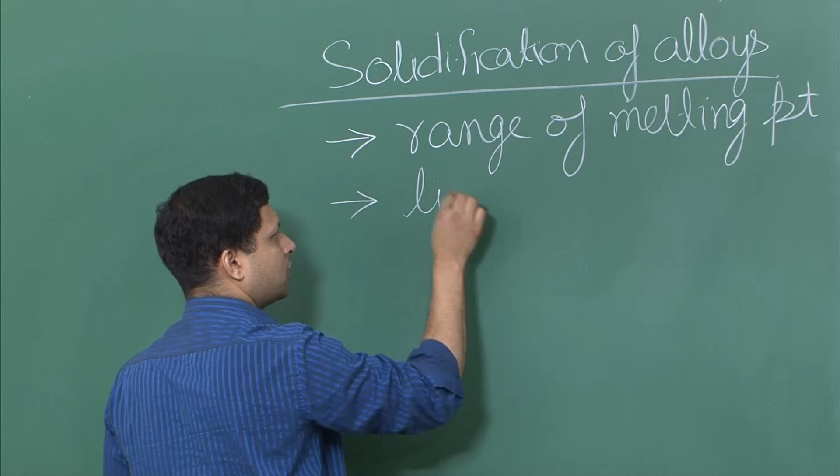What do I mean by range of melting point? Remember, it has a liquidus, it has a solidus, and in between these two temperatures the material remains or coexists as liquid and as solid. Therefore we can say that all the temperature range between the liquidus and solidus is the range of melting point.

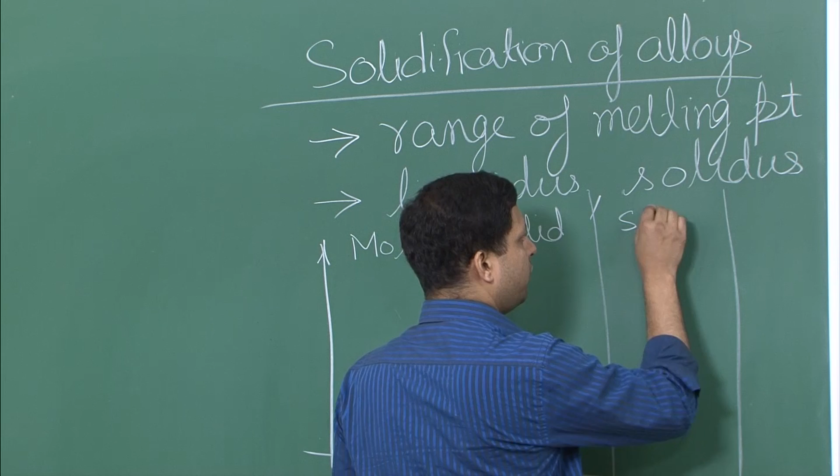So how will that make a difference? Let's start with how the temperature profile would look like. Here there will be a difference. So far we were talking only about mold, solid, and then used to come liquid, but here we will have another phase where we have both solid and liquid, and then comes the liquid.

So the temperature change, even if you are talking about these four layers, the temperature profile would look like this. We are assuming again the most general case, so there will be probably a temperature, heat resistance, interface resistance over here, and then from here and so on. So what do you see?

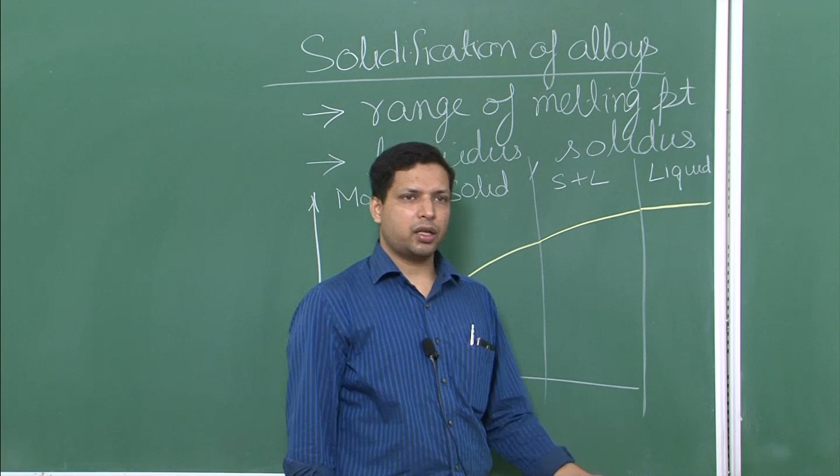The temperature in the most general case will show a temperature drop in mold, a temperature drop at the solid and mold interface, a temperature drop in the solid plus liquid region, and even here if we assume liquid at Tm, that is without superheat, that is not going to be a problem, or that will not take away any kind of information from us, but still it looks like a very difficult problem to track.

So again we will not look at how to derive this analytically - in fact I am not aware of any analytical solution for a case like this. Instead, what we will look at is what solidification rate people have observed experimentally, and see if we can relate it with what we already know.

Now if we are drawing this, let me draw what exactly these look like. This is your mold, now this is your solid, this is a liquid, and in between solid plus liquid, what do we have? Here you have some growing solids which exist along with the liquid.

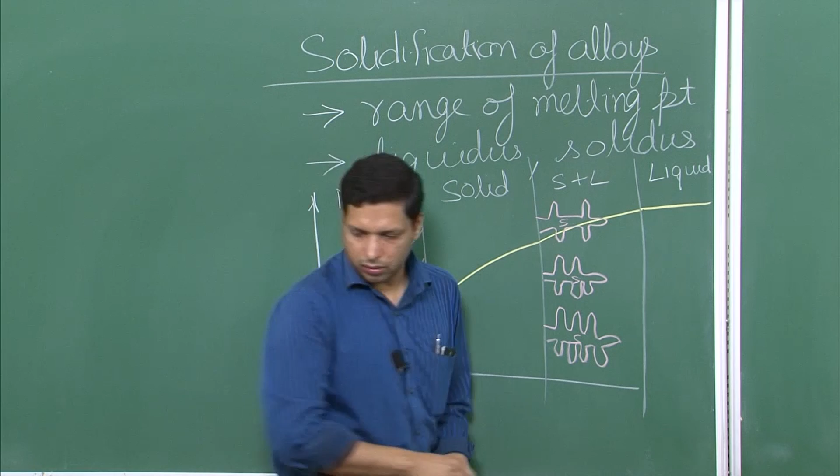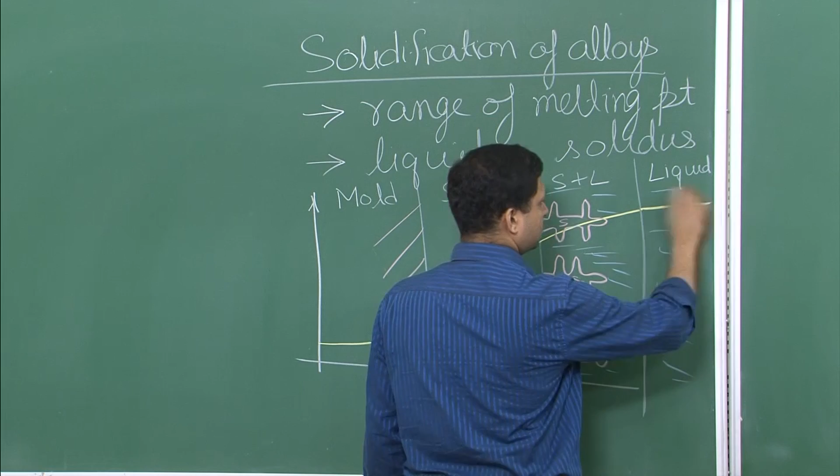So here this is your solid part, and let us use a different color - so this is liquid. And this is the solid part. So if we have...

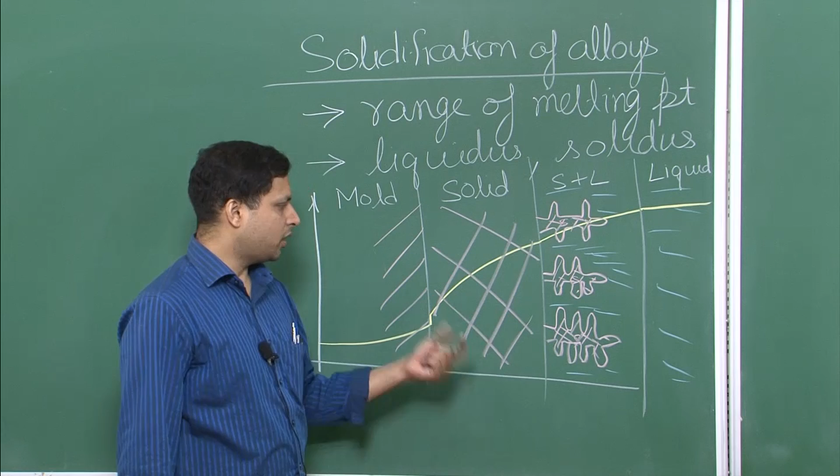Here is the mold, here is the region where there is only solid, and here is the region where you have both solid and liquid, and here is the region where you have liquid. So now you can clearly see that there is an interface up to which only solid exists. So that is your solidus line, and we can call it XS.

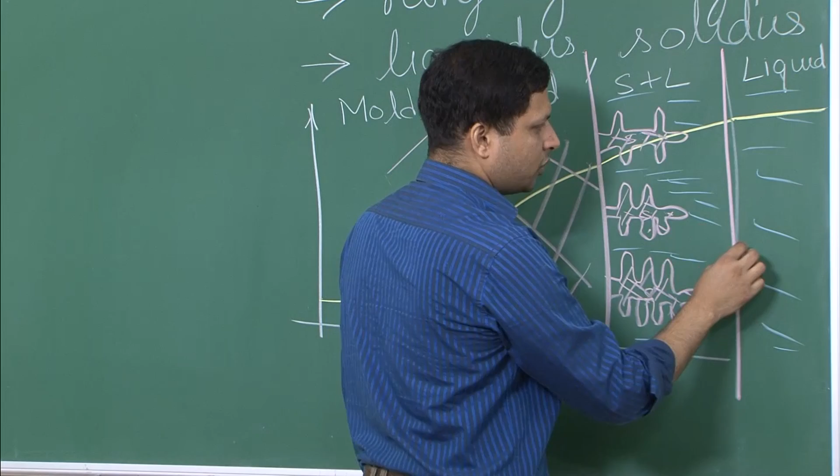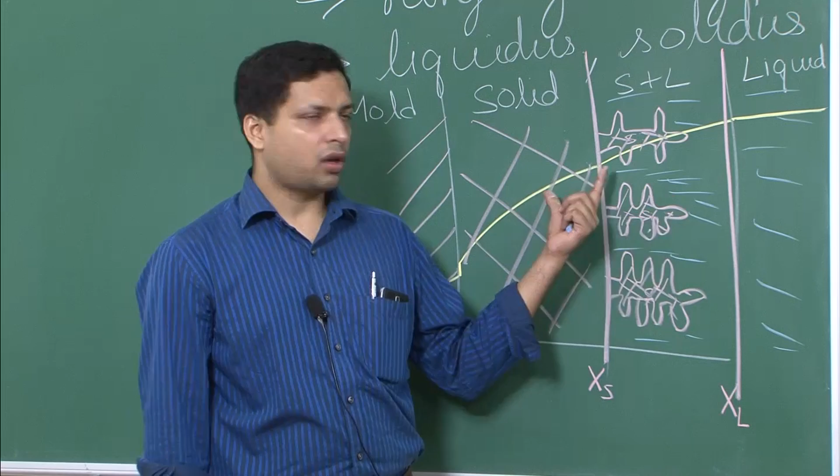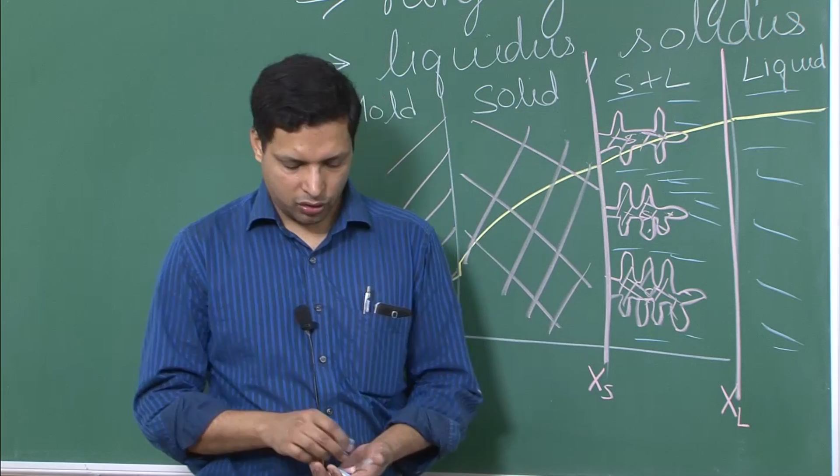This is a line beyond which you have only liquid. So this will become your liquidus line, and let's call it XL. Now when we are looking at solidification rate, or basically the S versus T plot, we will not be looking at only one line. Remember, earlier we had only a solid-liquid interface, so we used to draw only one plot, but now we have two things to look at, XS and XL, the solidus line and the liquidus line. So let's draw how this will look like.

So S is the length which has crossed or which has solidified in terms of liquidus or solidus, and now this is, let's say, the top of the mold.

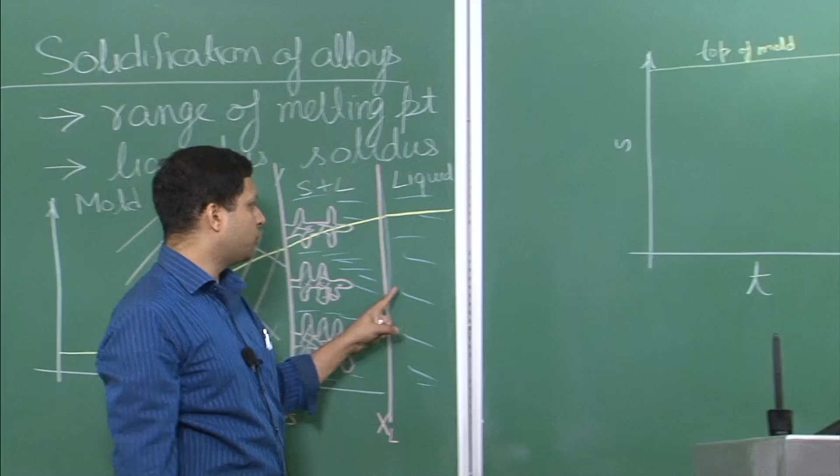So now for the solid, the first interface to reach the top of the mold would be liquidus, as you can see, it is ahead of the solidus. So in terms of time, it will reach this point earlier than solidus, and it comes out something like this.

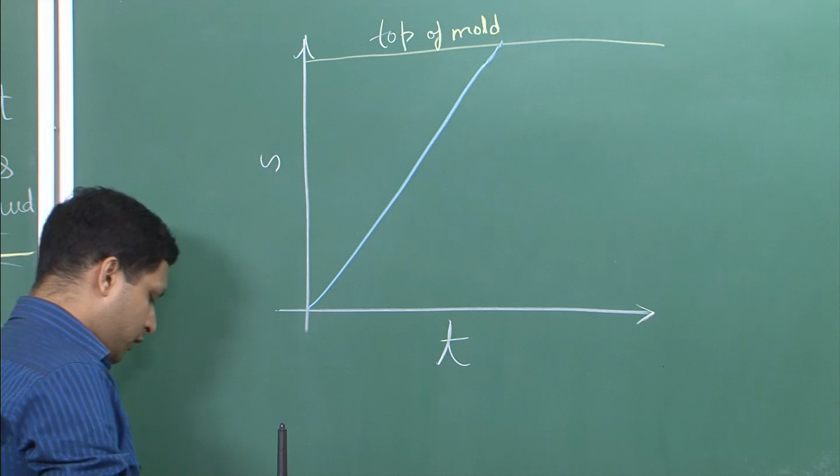And for the solidus, you get this plot. So this is how the plot looks like, and there is just one modification: this has to be root T, because we are assuming an insulating mold kind of condition.

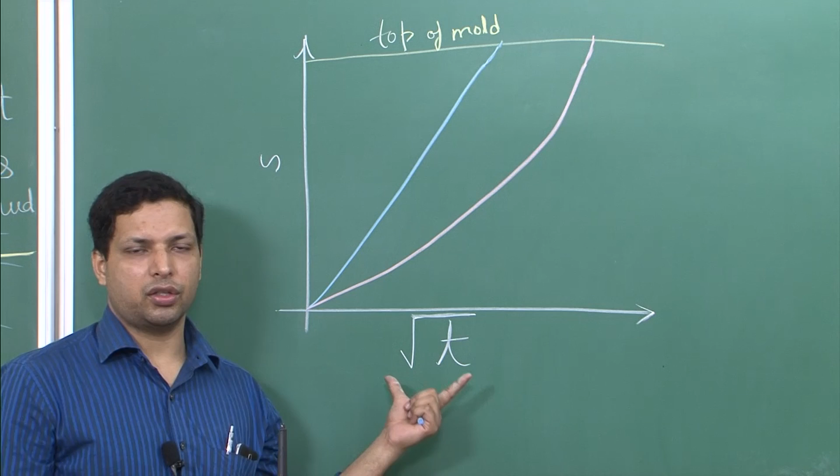Whenever we have a sand mold like this, the condition is like that of an insulating mold, and for insulating mold, you remember, S is proportional to root T. Remember I had earlier mistakenly written it as T. It is not T, it should be root T. So S versus root T, you see a straight line.

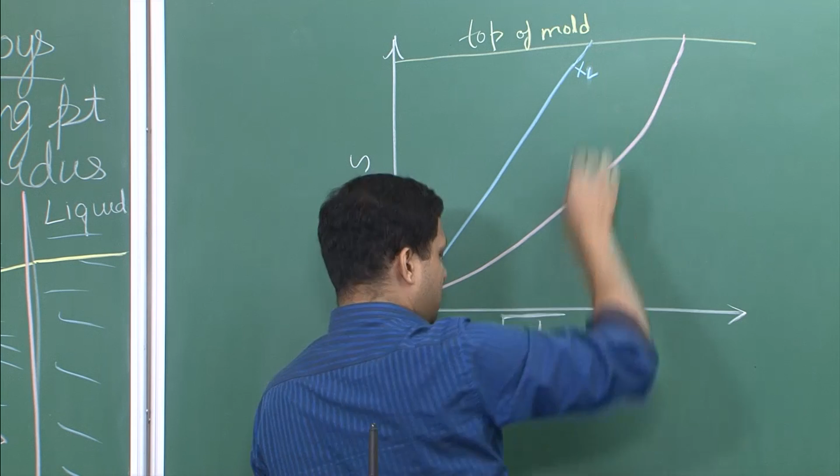Now there are a few things you can look at in this plot and understand. One is that the liquidus—so now this is your XS line, and this is your X, this is your XL. It has reached the liquidus, reached the top of the mold earlier, and this is your solidus line.

So as you can see, liquidus has reached the top of the mold, or it has reached the end earlier. Solidus has reached after that. We already know this from here: this will reach earlier, this will reach later on.

Another thing is that XL follows a straight line between S and root T. So it very nicely follows the S versus root T plot. Therefore it agrees very much, you can say, with the insulating mold condition.

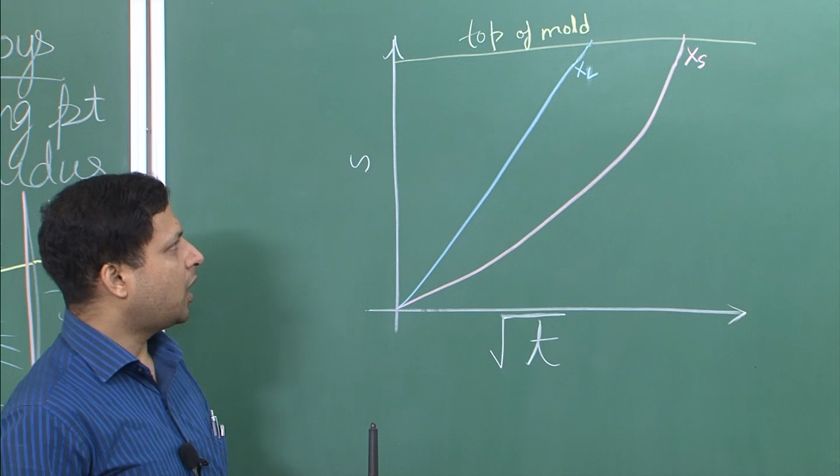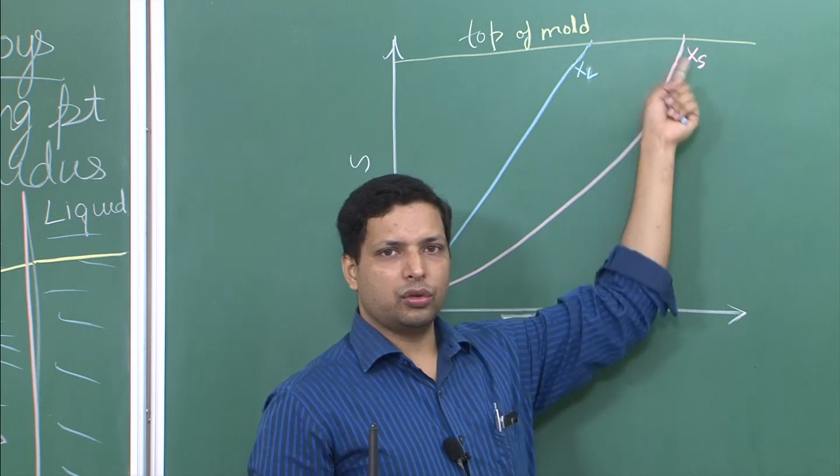On the other hand, XS, which is the solidus curve, shows some variations. Although it is a straight line to most extent, towards the end it rises very sharply. So there is some change that occurs towards the end, and you can understand that once the liquid has solidified, then suddenly the concentration—we will see that more when we talk about composition—towards the end the composition rises abruptly, and that may be what is leading to this change in the plot.

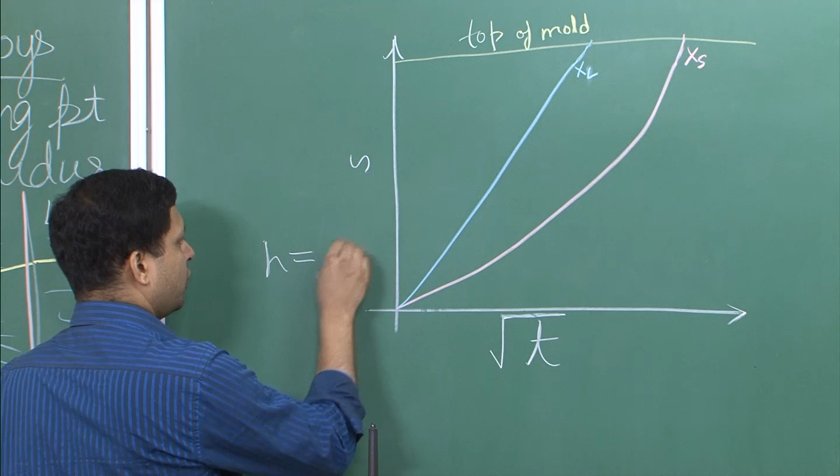Now another thing is that when we are doing this, we are assuming that H is equal to infinity. What does H equal to infinity mean? It means this is 0, there is no gap over here, or there is no interface resistance.

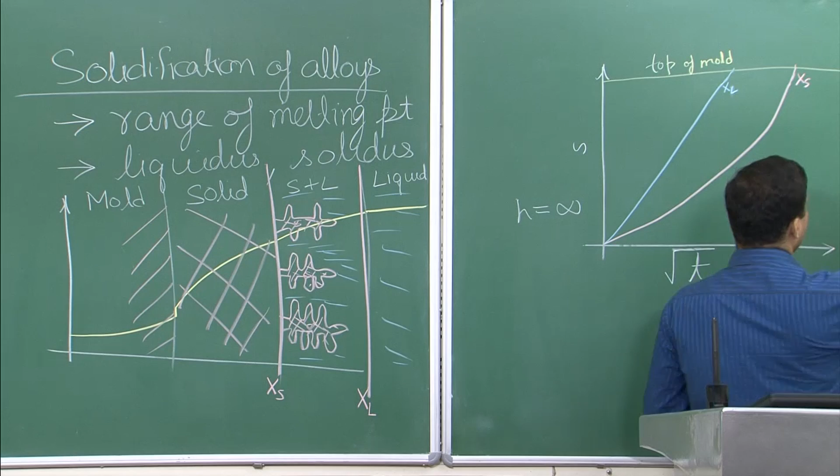If on the other hand we take H as some small quantity, it means that there is some amount of interface resistance, and that will lead to some change. What changes will we see?

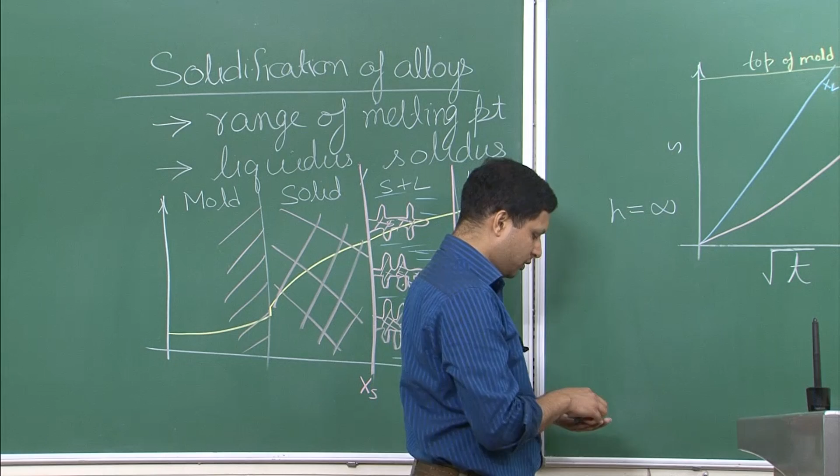So the first change is, in terms of liquidus, you don't see much change. The liquidus remains as it is. So this is S, this is root T.

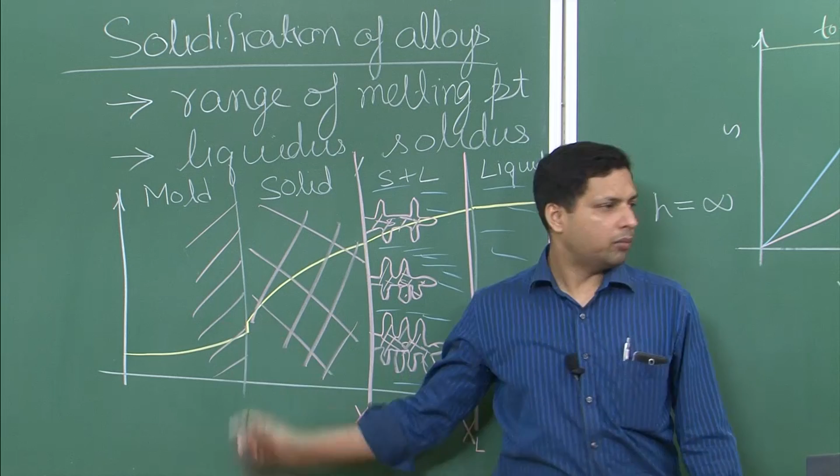But when it comes to solidus, you see a shift over here. Overall the plot remains the same, but over here, because of the presence of interface resistance, whenever there is an interface resistance between the solid and the mold, you would see that the XS, which is the solidus plot, gets shifted a little bit in time. It starts a little later.

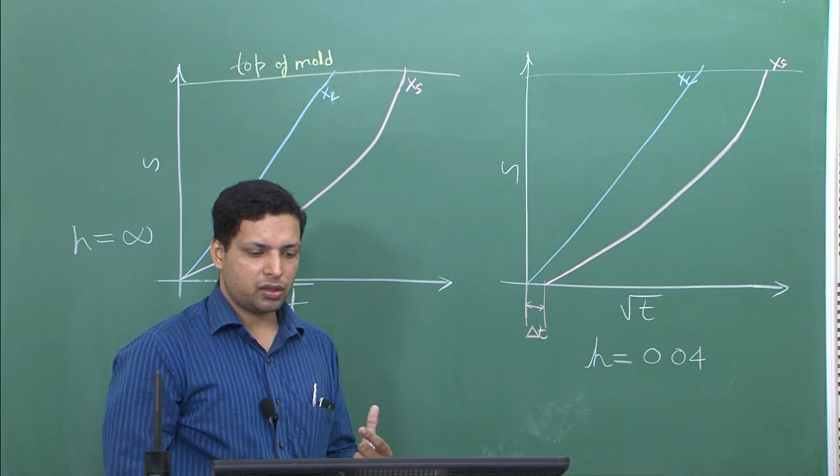And remember, we talked about it when we said that S equals A root T minus B, kind of has the experimental form, that is what people have observed. And that delay, one reason suggested was that it is because of the interface resistance, because in some materials or configurations where you say there is no interface resistance, there is still some finite interface resistance, and that is what leads to that minus B term.

And this is what we can see over here. Here we have some finite interface resistance, and this leads to a delay in the solidus curve. So these are the two different kinds of S versus time plots that you will see for the alloys.

Now there are a few more things that we should look at. If you look at this gap, what does this gap represent? For any particular time, what it is saying is that your solidus is at this point and the liquidus is at this point.

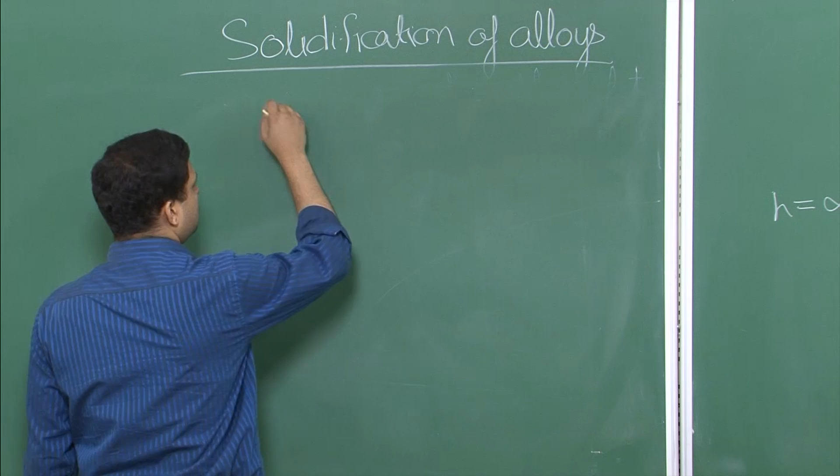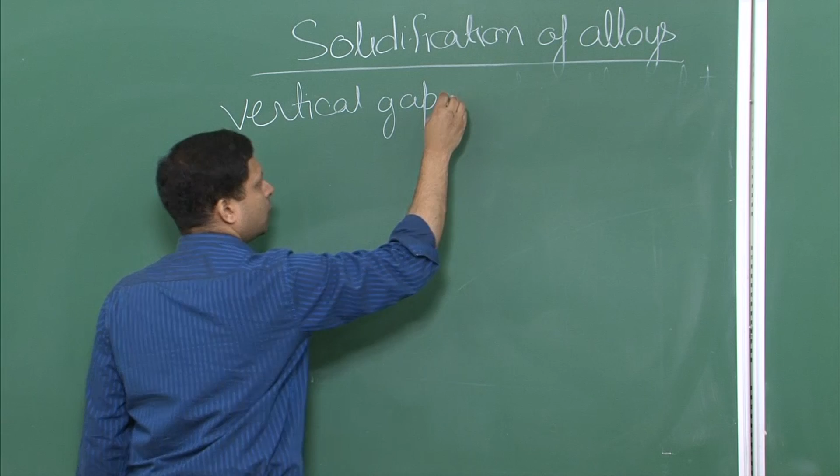Let us give it a name - it is called width of mushy zone. It is not a name I am giving it, it is what it is called. So this vertical distance, that vertical gap that we get, it represents width of mushy zone.

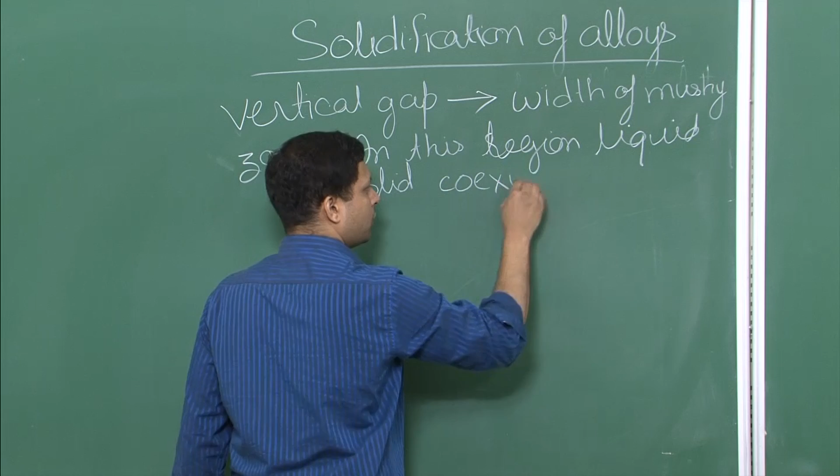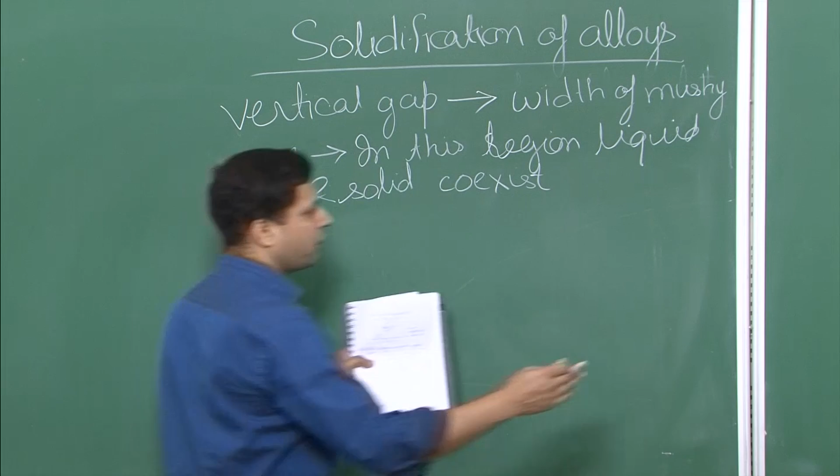Why is it called or named like this? Because in this region both liquid and solid coexist. If you look at this particular time, this is where the liquidus is, this is where the solidus is, and therefore it represents, from your original plot, the region where both solid and liquid exist. So it represents the width of that region, and therefore it tells you the width of the mushy zone.

Now there are several important points that you must be aware of when we are talking about this width of mushy zone. One, it determines the macro segregation behavior.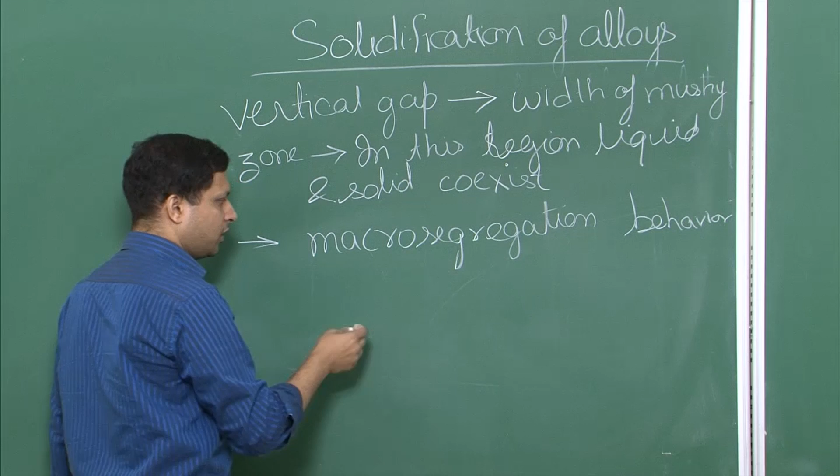And not only macro segregation, since it is influencing macro segregation, it also influences and can influence the overall microstructure.

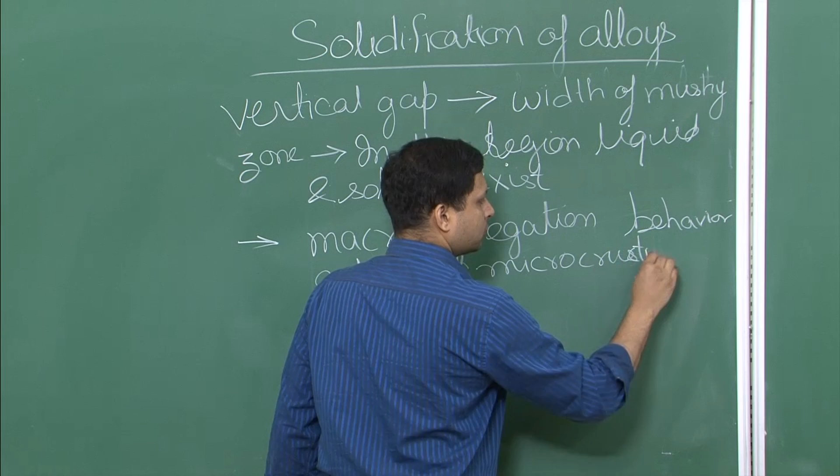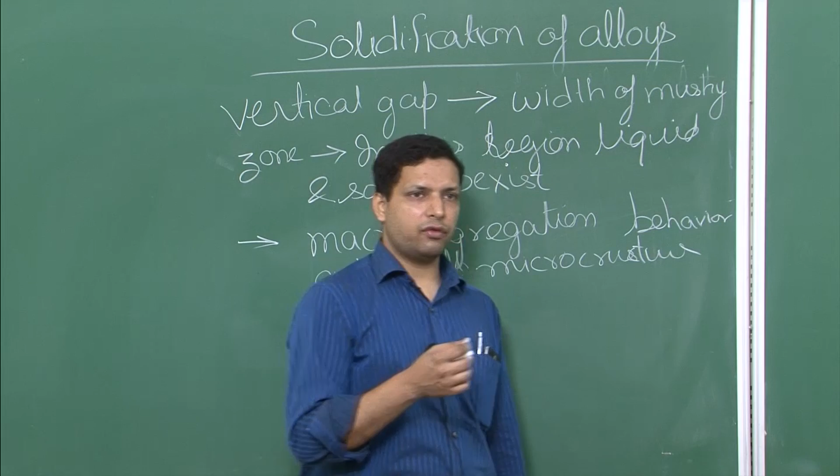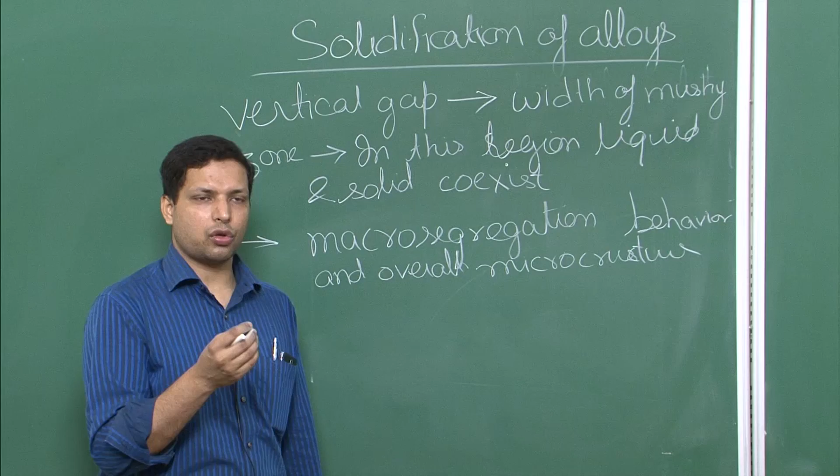Now, when the solid part solidifies first, or the liquidus has been reached, and then some solid and liquid is left, the outside region is solid, but in between you have some liquid remaining. If that liquid is remaining and once it starts to solidify, it will contract, and because of that it leads to stresses, and it can even lead to hot tear.

So it is this width that also determines the hot tear in alloys. Larger the width, larger the chances of hot tear. Smaller this width, smaller are the chances for this hot tear.

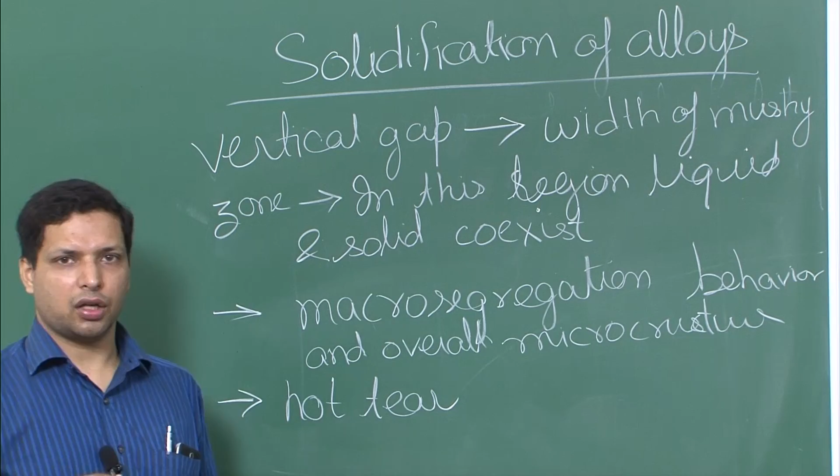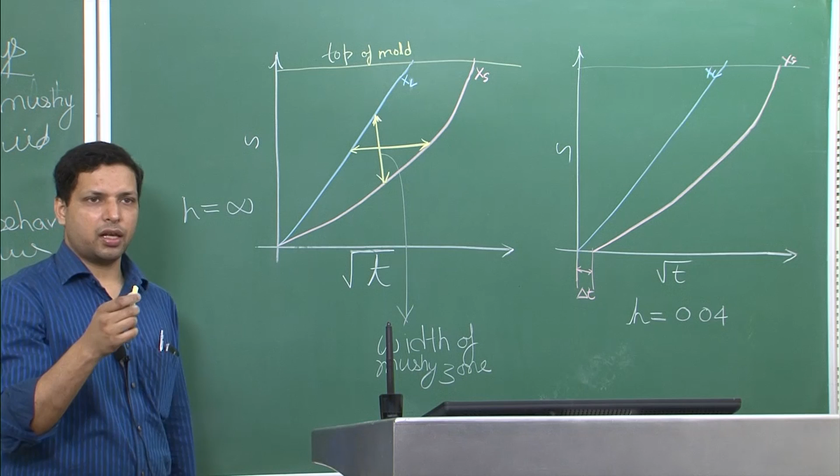As you can see, that is one aspect of the plot, which is the width of the mushy zone. The other is this gap over here. What it is representing is that if there is a particular point in your unidirectional solidification of the alloy, then what is the total time that it takes.

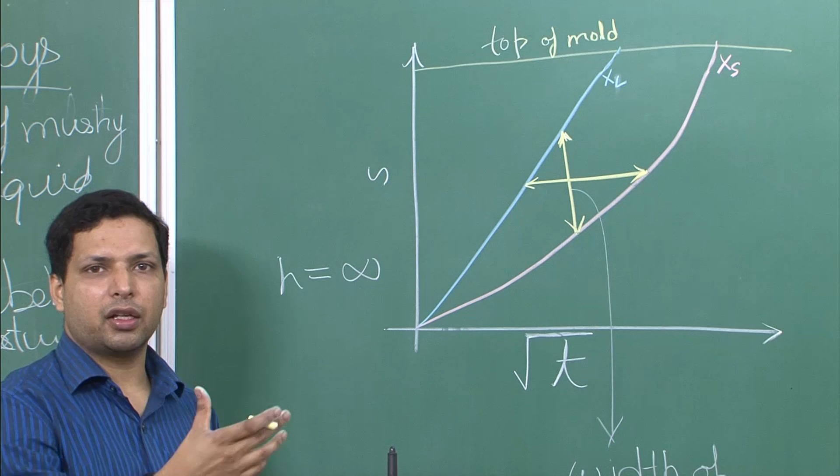First, from the point that the liquidus crosses it to the solidus crossing it - it is at this point liquidus crosses it and it is at this time solidus crosses it. So in these two, as you can see, it is the horizontal axis, and the horizontal axis will represent time. So it represents the time difference between the liquidus and solidus curve crossing.

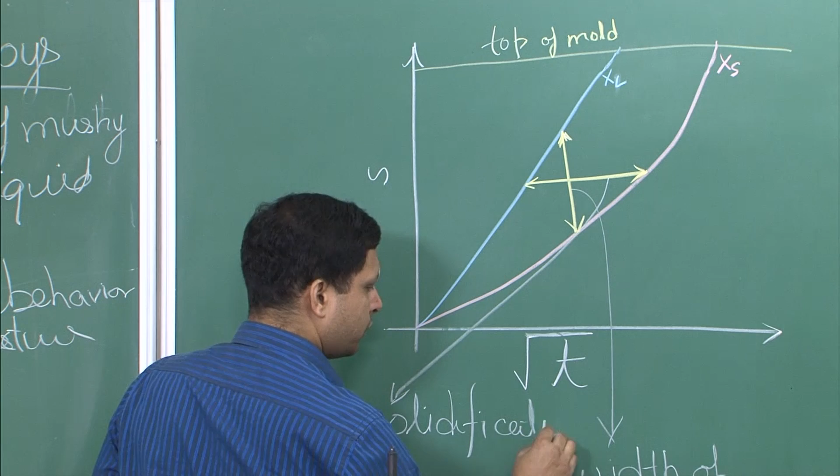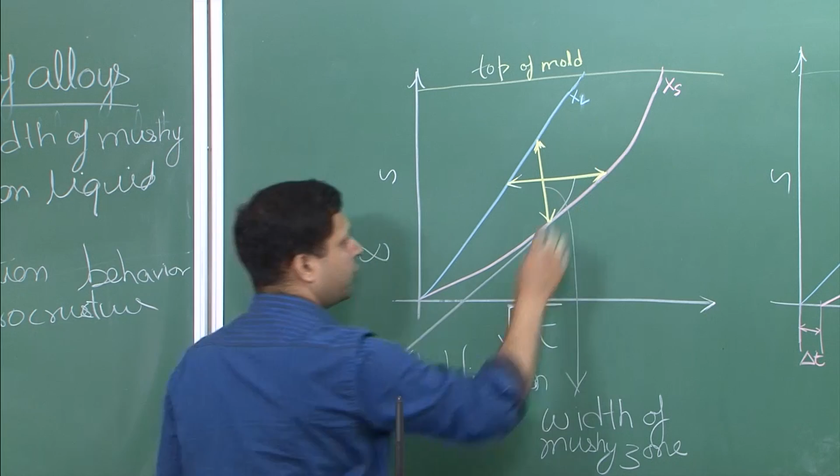And therefore it is termed as local solidification time. So this region is the local solidification time - the time that, at a particular point after the liquidus is crossed, how much time it will take for the solidus to cross. Now that time is also again of importance when we are talking about alloy solidification.

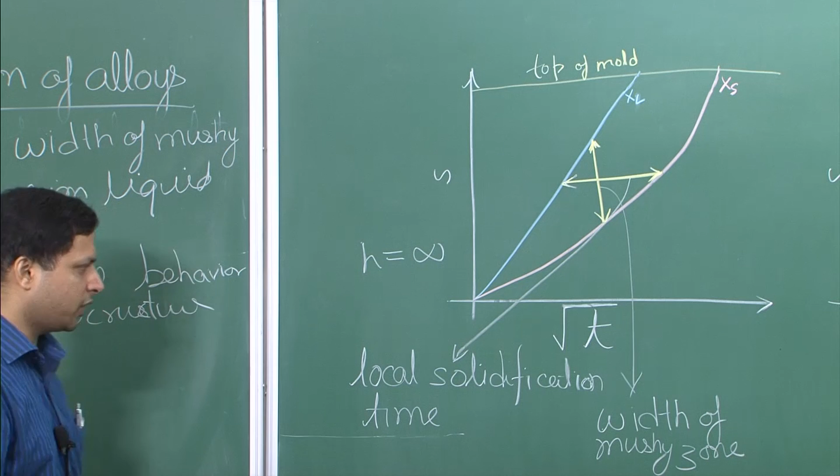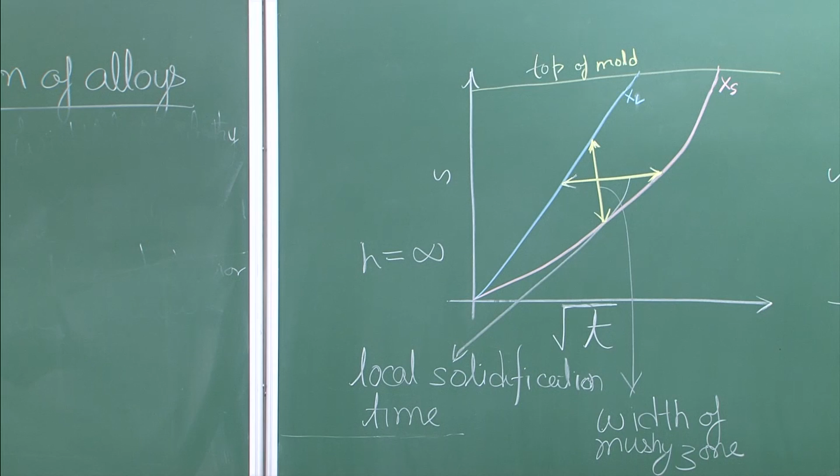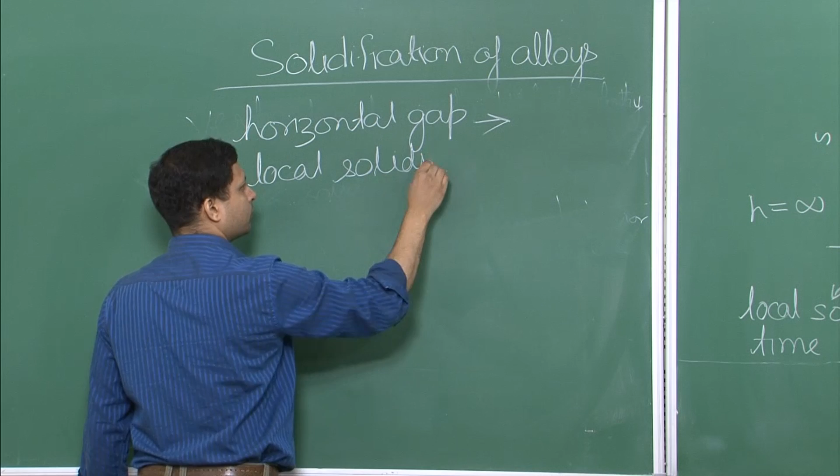So let us again put some of these points in perspective. This horizontal gap - what does it represent? It represents local solidification time, and like the vertical gap, it also determines some of the characteristics.

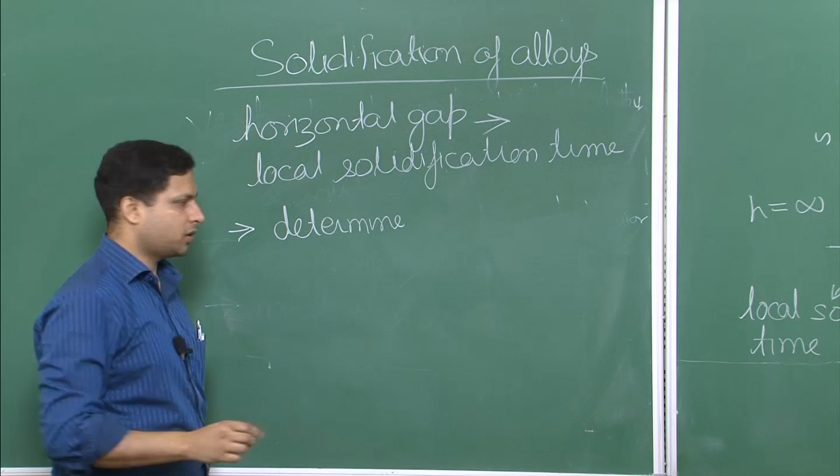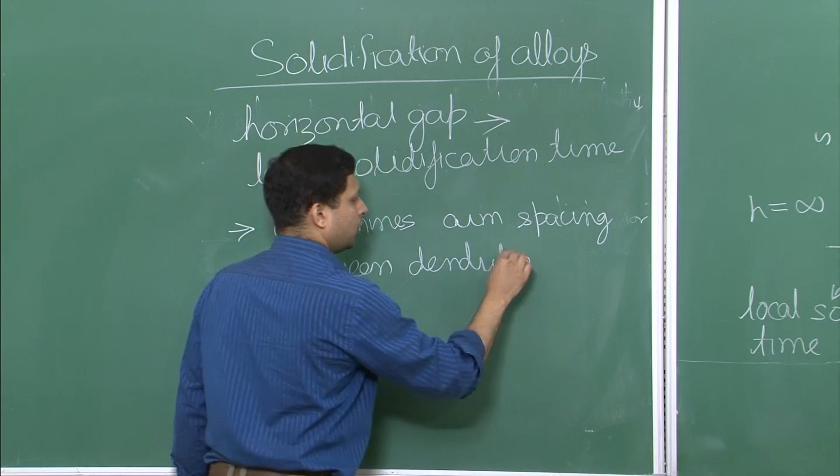What are those characteristics? It determines the arm spacing between the dendrites. So both of these gaps have importance. If you can get this plot experimentally, then based on the horizontal gap and the vertical gap that you are getting, you can say or understand a lot about the behavior of the material that you will obtain after solidification.

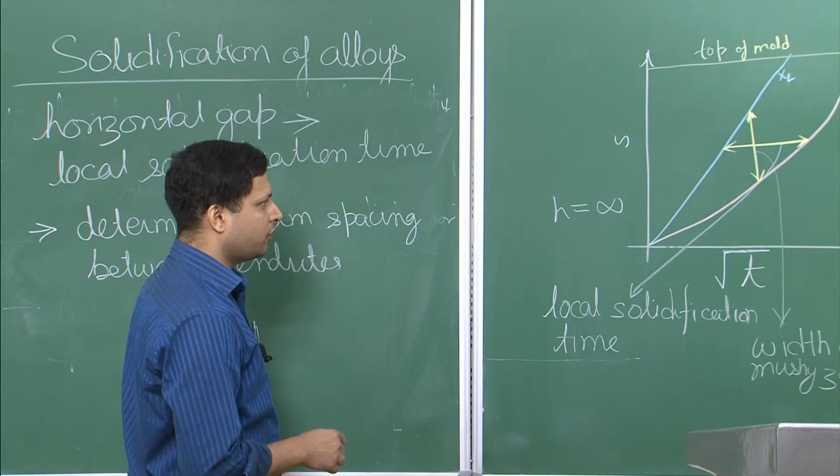Now, that is the solidification in general, solidification of alloy in general. Now there is one thing in particular that we can still get from this, although we are not looking at the heat flow equations and all those details, but let us say that we were looking at solidification of alloy in a very insulating mold.

So we are still looking at solidification of alloy, but now we are looking at insulating mold condition. Now, remember what was the implication of insulating mold? When we are talking about insulating mold, it means that maximum temperature drop takes place in the mold.

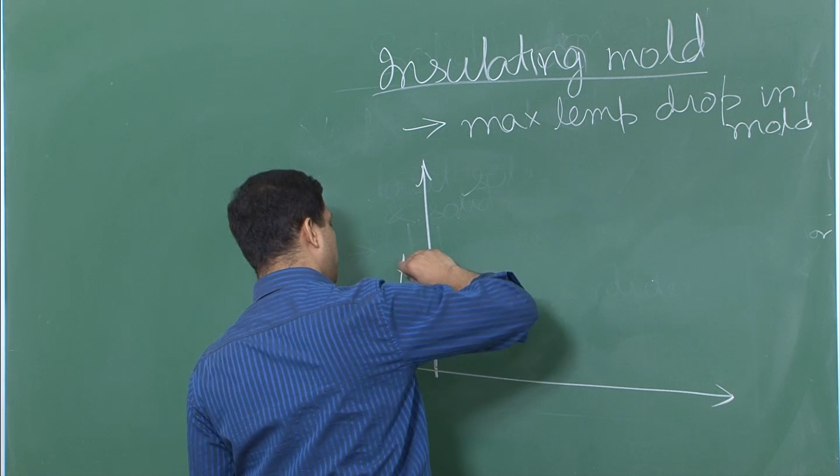Right, so the maximum temperature drop has to take place in the mold. How will it change? Let us start from our temperature profile. This is your temperature, this is your distance, and this is the mold, this is the solid.

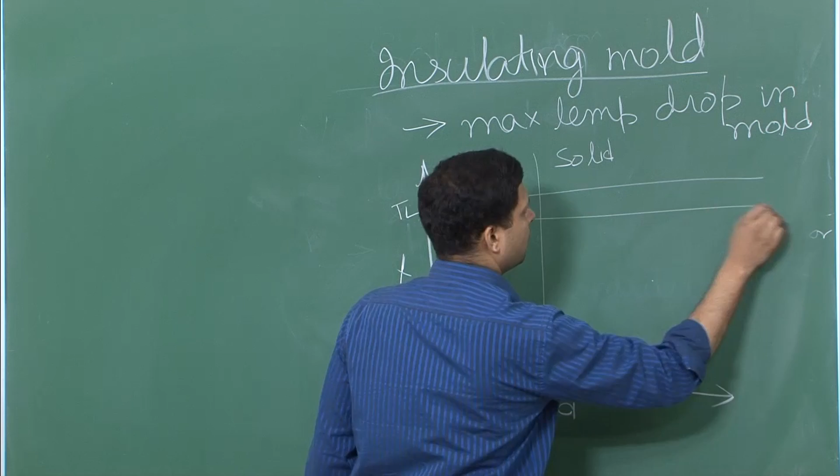Now if the maximum temperature drop, if this is now your Tm - actually we should not call it Tm, we will have T liquidus and T solidus, and since liquidus is higher, this is T liquidus, this is T solidus. So the region below which you get only solid, you will call solidus.

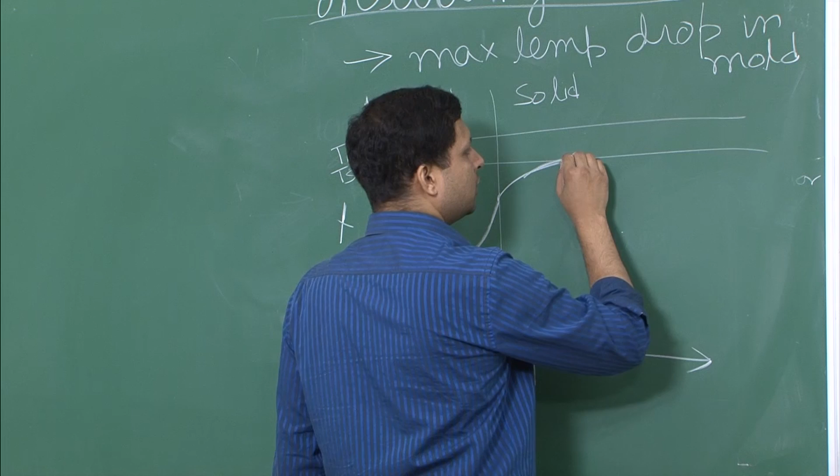Now over here we will have maximum temperature drop taking place in the mold, and then we have the solid over here. This represents our solidus, this represents our liquidus, because below this you have only solid, above this you have only liquid, and over here you have solid plus liquid.

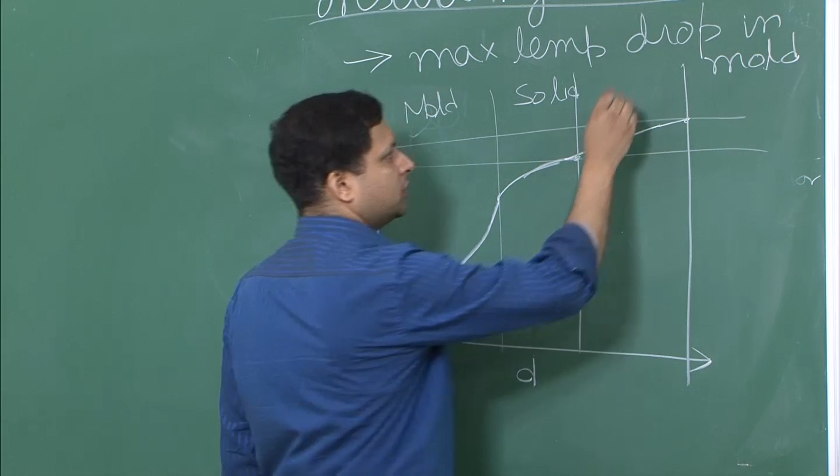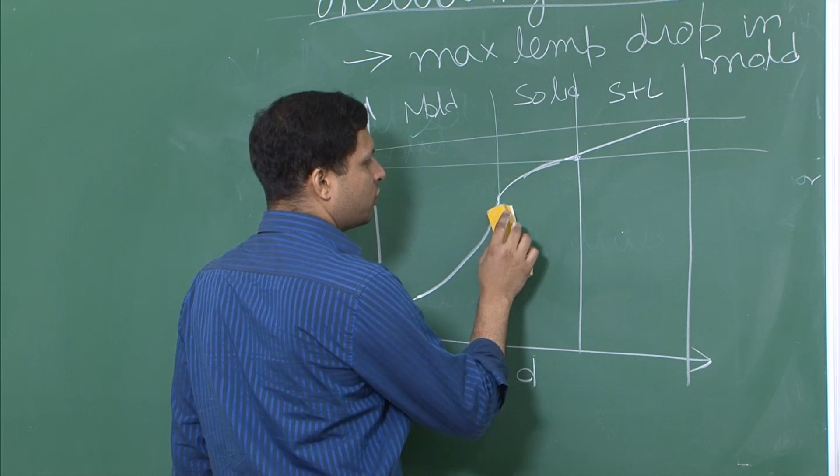So now this is one plot. Actually what I wanted to draw was a little bit different. Since we have an insulating mold, our temperature drop should be even larger in the mold part. So let us bring it over here, and therefore now what is happening here, you see this becomes your solid part, this becomes your solid plus liquid part. Let me clean it a little bit so that you can clearly see.

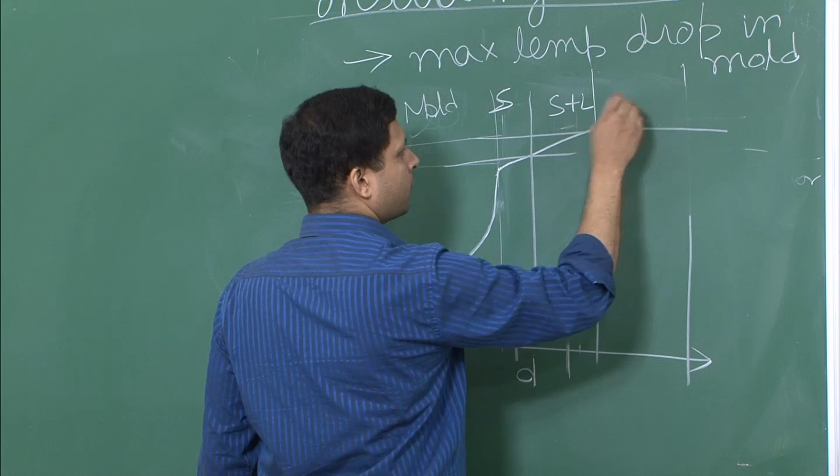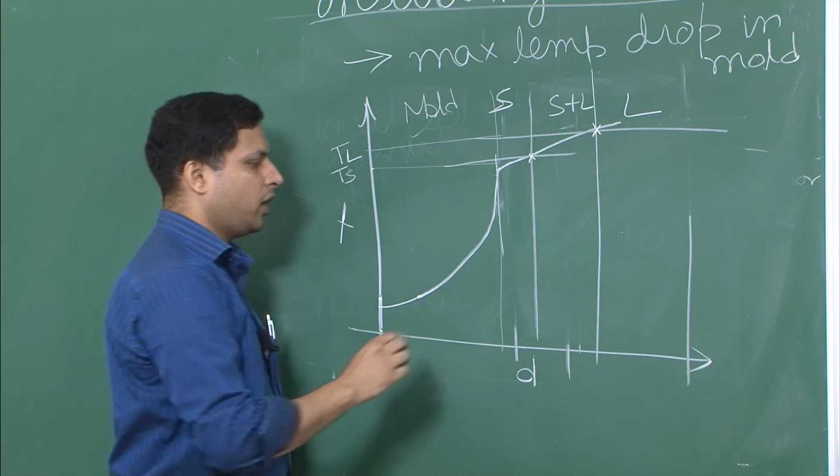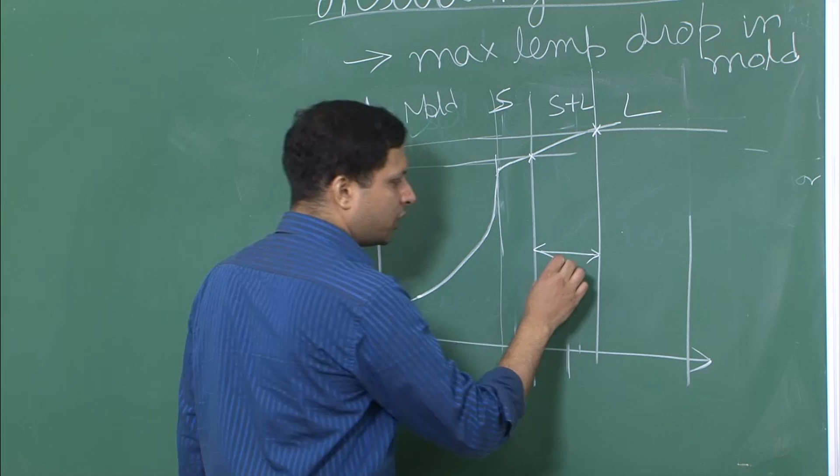So what is the difference that we have now compared to what we had earlier? The difference is that because the maximum temperature drop is taking place in the mold, there is a very small range of temperature change in the solid and the solid plus liquid part, which means the width of this zone, which is more important than any other width, becomes larger.

So when we are talking about insulating mold conditions for solidification of alloys, the solid plus liquid region, or the width of the mushy zone, becomes larger.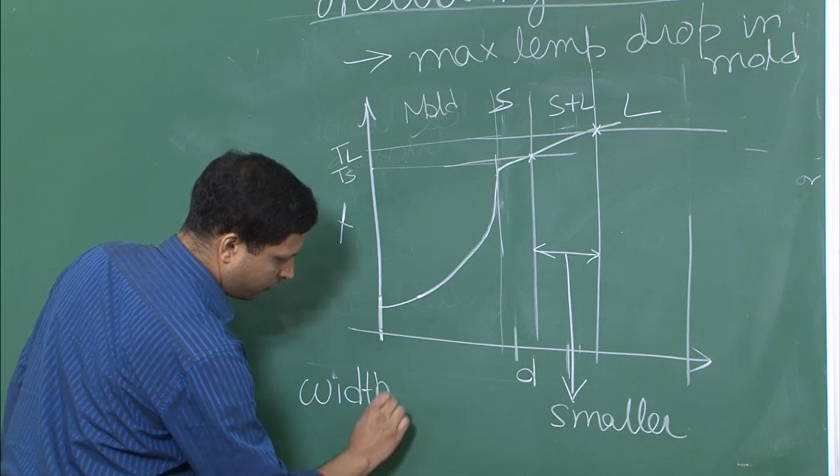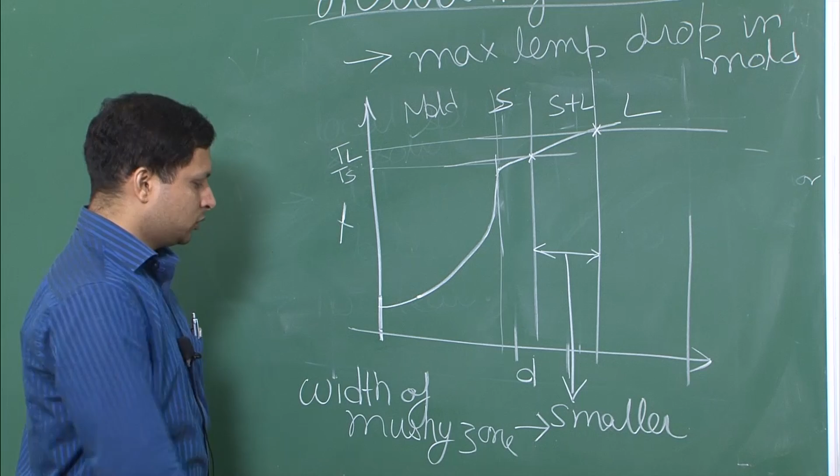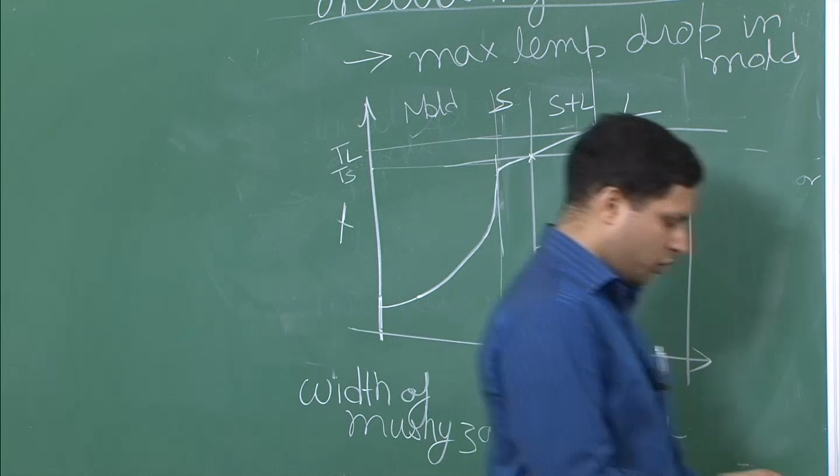So now we have a smaller width of the mushy zone, which means that as soon as the liquidus reaches the end, the solidus will also reach the end. Or in terms of this plot, if we look at it, the total time difference becomes very small.

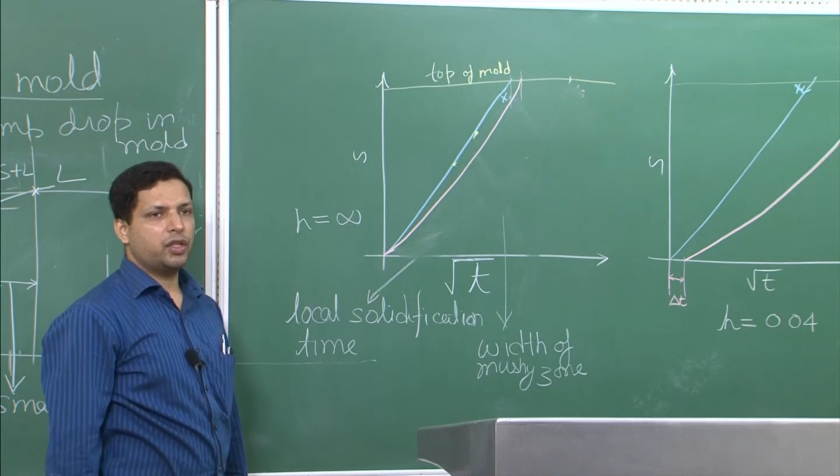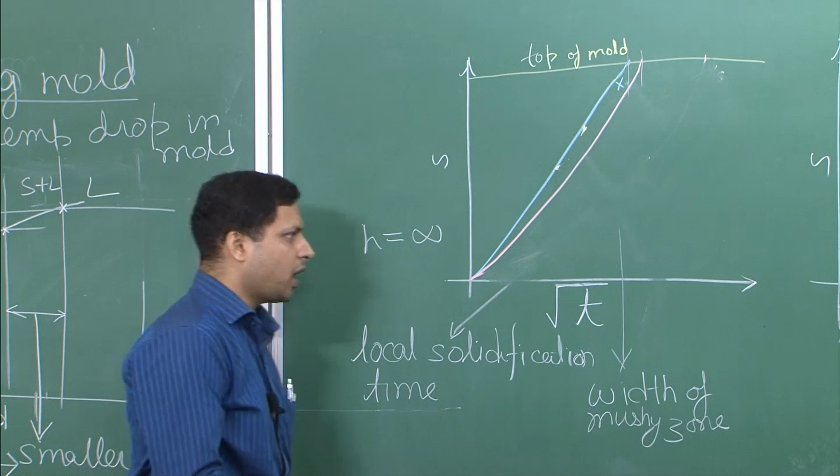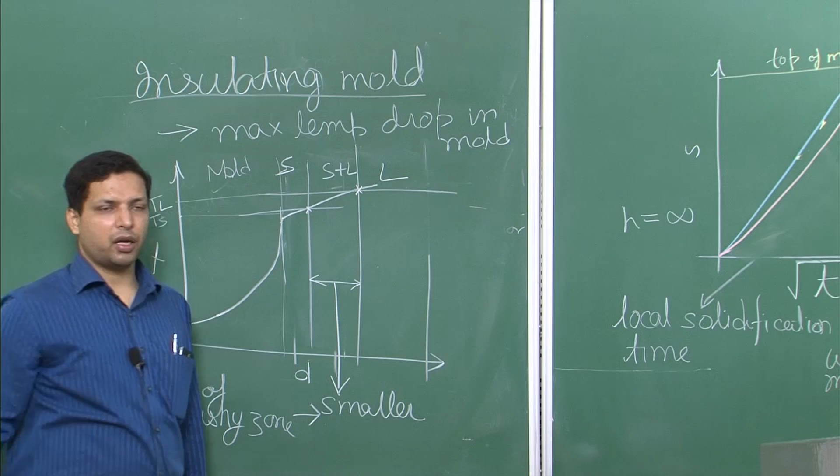As soon as the liquidus reaches the top, solidus also reaches the top, and therefore it starts to behave like a pure metal. Therefore the overall equations that we derived for pure metal can also be applied for something like this. So when you have a very insulating mold where maximum temperature drop is taking place inside the mold and not inside the solid and solid plus liquid part, it means the material will behave very similar to what we discussed for pure metals.

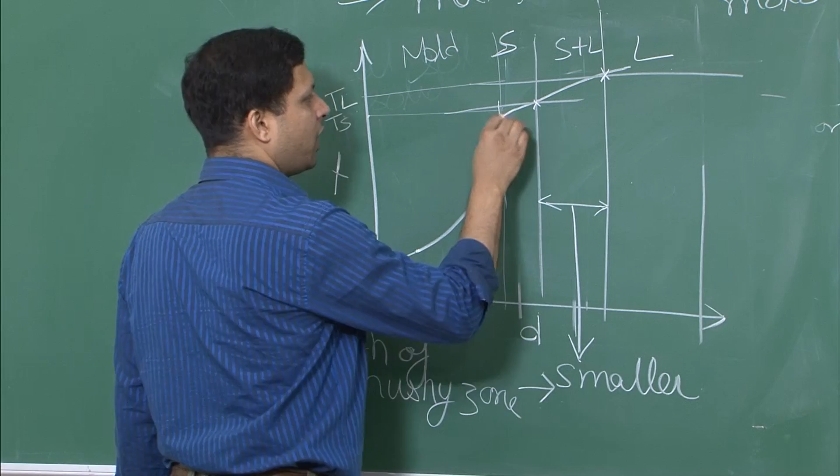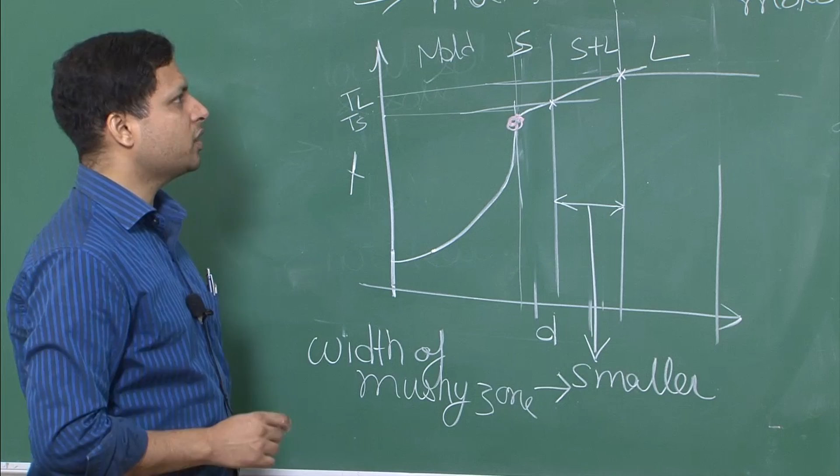The only difference would be that this temperature at the mold-solid interface will keep changing, although in a very small narrow temperature range, but it will change with time, which we did not have for pure metals. Otherwise all the equations we derived for pure metals can be applied for solidification of alloys when using an insulating mold.

So with that we come to the end of solidification of alloys, and it is a good time to review what we have done for the heat flow component. Let us summarize what we know. We talked about solidification of castings and ingots, and said the overall equations are always very complicated, but we need some simplifications.

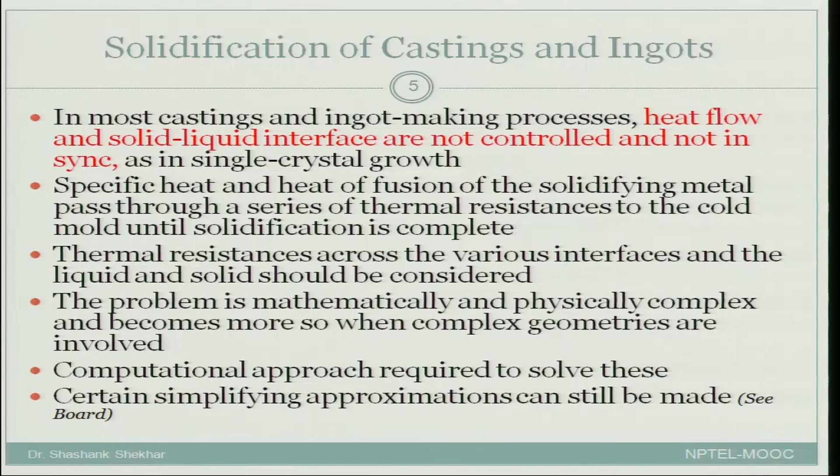For that, first we need a heat flow equation, and we saw that the heat flow equation comes from the conservation of energy, which gives us Fourier's law, and from there we get the heat equation. You can go to some Wikipedia type websites to get more detailed information about the heat equation.

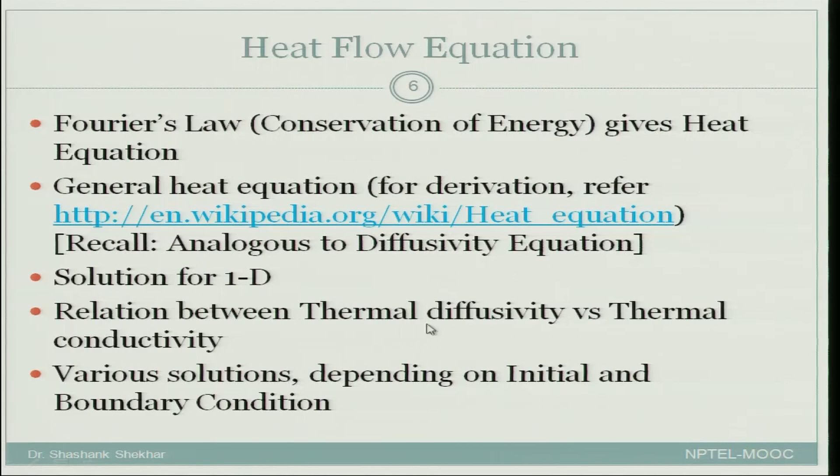And in this particular course we solved the 1D solution for two very simple cases. One was the insulating mold, the other was the interface resistance. And then we also showed you the solution for two difficult cases, although we did not go through the mathematics of it. We showed you that there is a relation between thermal diffusivity and thermal conductivity, and various solutions were discussed. And at this point I would again like to emphasize, we discussed two different important conditions,

or two different temperature profiles that we have discussed. One was the semi-infinite insulating mold condition. Over there you remember we said that the outside temperature remains constant, but not because we are fixing it or enforcing it. It is because the mold size is assumed to be so large that the temperature rise will take place after such a long time that solidification would have taken place before that.

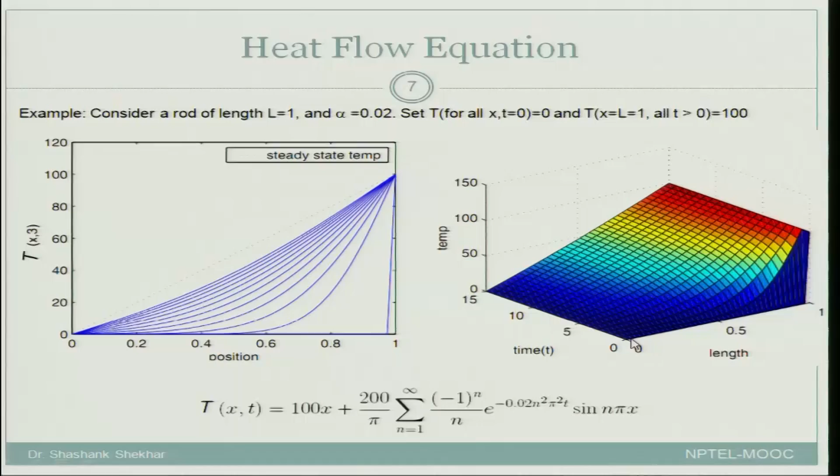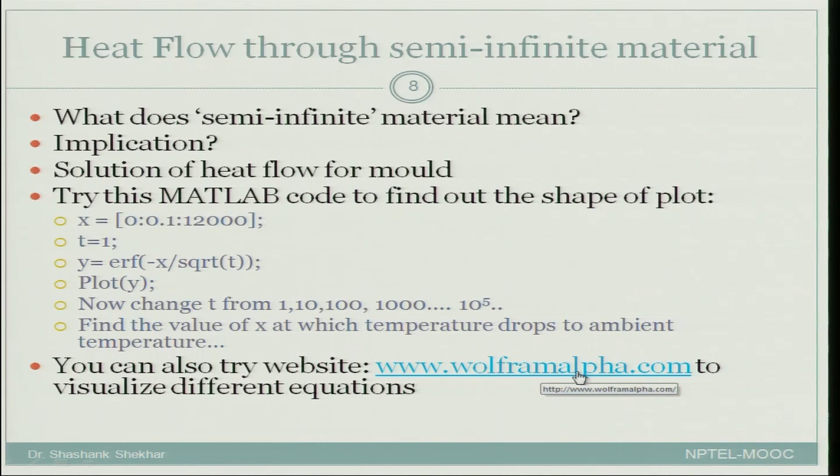So we talked about what semi-infinite means, and if you are interested in some computation for this, there is a very simple MATLAB code that you can use to plot, and we will show the plots that you have. This is a very simple plot for the semi-infinite mold, and here is the equation that we have for the semi-infinite mold condition. In case you do not have MATLAB, you may even try this website, which is the parent company of Mathematica, and over here you can simulate some of these simple programs. And this is the plot I have shown over here for different times. See, over here time is equal to 1, 10, 100, 1000, and I have kept the total distance constant, and in some unit this is the temperature.

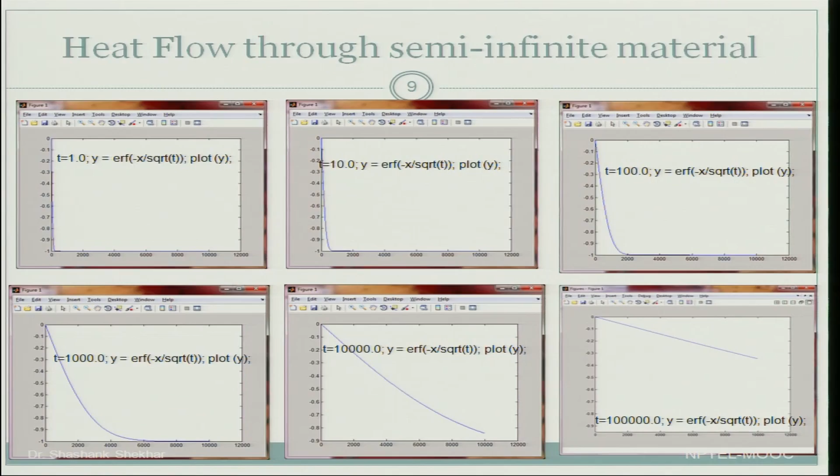So we will leave it at this, and we will come back and summarize some more of this and solve some problems related to this, and then we move on to the next part of the course, which is compositional variations when you do solidification. So we will meet in the next lecture.